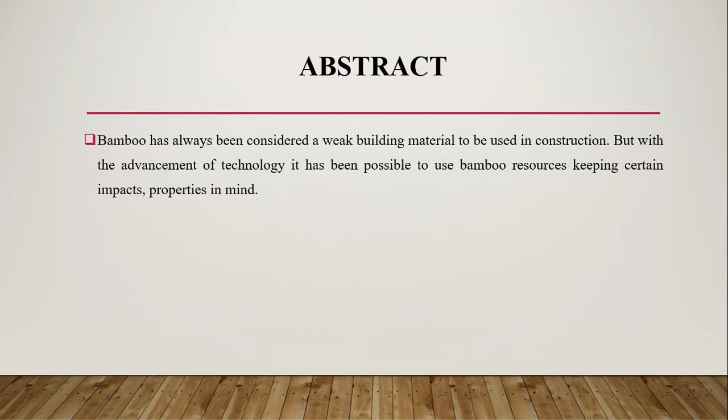Starting from abstract. Bamboo has always been considered a weak building material to be used in construction because we use steel of grades such as Fe250, Fe415 and Fe500. But with the advancement of technology, it has been possible to use bamboo resources keeping certain impacts and properties in mind. Northeast of India has abundant bamboo resources.

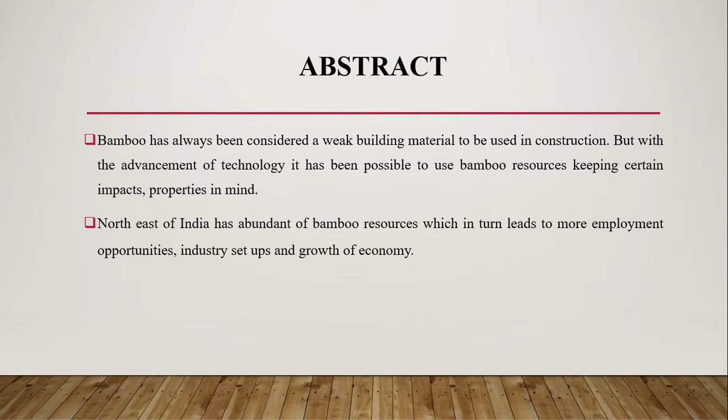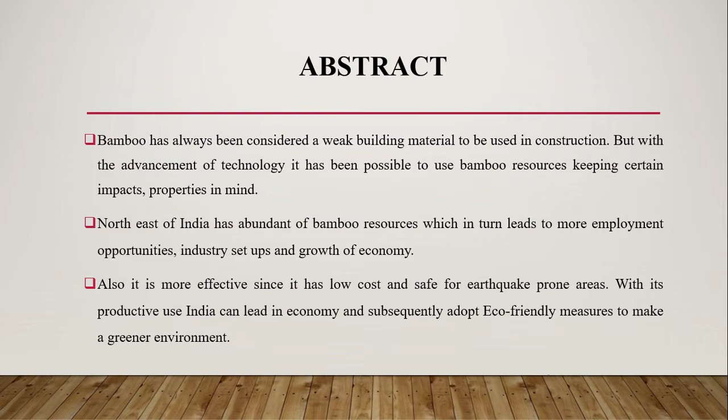Northeastern states like Assam, Meghalaya, Mizoram, etc. have abundant bamboo resources, which leads to employment opportunities, industry setups and growth of economy. Also, it is more effective since it is low cost and safe for earthquake prone areas, since the northeastern part of India is in zone 5 as per Indian Standard Code 1893 Part 1 2016. So with its productive use, India can lead in economy and subsequently adopt eco-friendly measures for a greener environment.

Coming to introduction. The northeastern region, a landmass of 8 states, spreads over an area of 2,62,179 km square, which represents about 8% of the total geographical area of the country, with a population of about 39.04 million, and is a region which is abundant in bamboo resources. The region houses about two-thirds of the bamboo resources of India, spreading over an area of about 3.10 million hectares, where 89 species of bamboos are available.

The main center for technological input in respect of bamboo is located at Guwahati, and it is named as Cane and Bamboo Technology Center. Among other industries, a bamboo wood factory has been set up in Jagi Road. ACES BioWealth Private Limited has been set up. According to it, bamboo has the capability of being water resistant for about 100 years.

Coming to positive impact. Modulus of elasticity of bamboo is in the range of 1.5 to 2 × 10^5 kg per centimeter square, while that of mild steel is 2.1 × 10^6 kg per centimeter square, thus making it suitable for reinforcement if used after certain treatments. Certain treatments like natural and non-natural are there. In case of natural, high steam temperature method is one of the effective methods, and a chemical one like borax salts treatment is there.

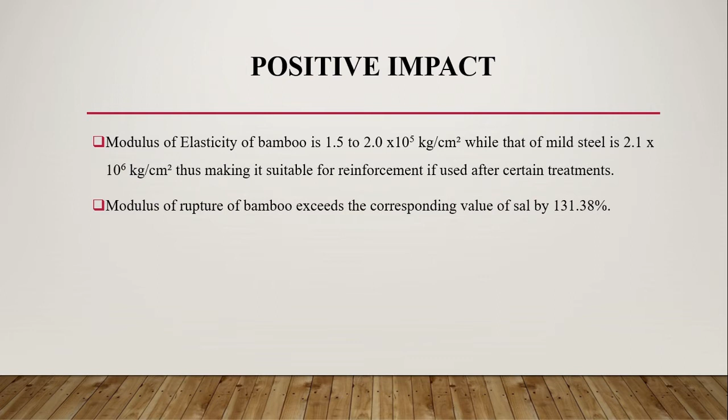Modulus of rupture of bamboo exceeds the corresponding SAL value by 131.38%. SAL is used in door frames, wooden beams, etc. So, in place of SAL, bamboo can be used. Safe working stress in compression of bamboo is 105 kg per centimeter square, and the allowable compressive stress value has decreased by 20%. It can withstand up to 3656 kg per centimeter square of pressure, whereas mild steel has about 2547.5 kg per centimeter square. So bamboo has even more than mild steel.

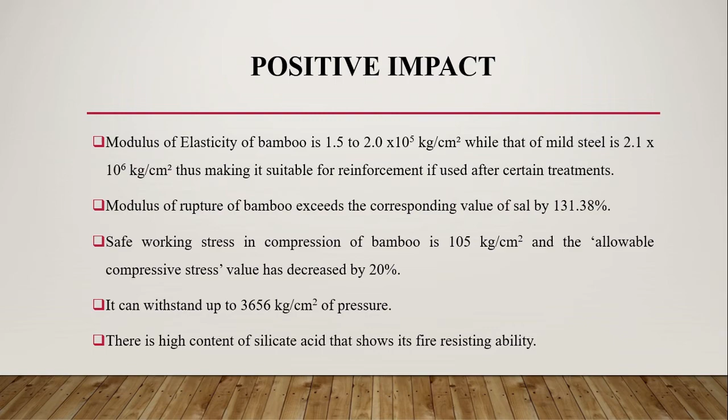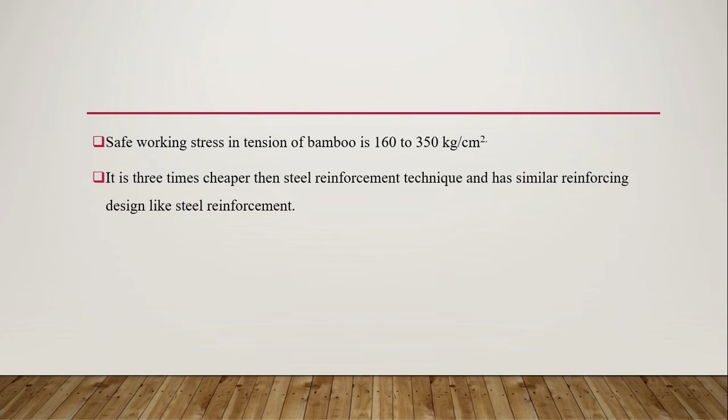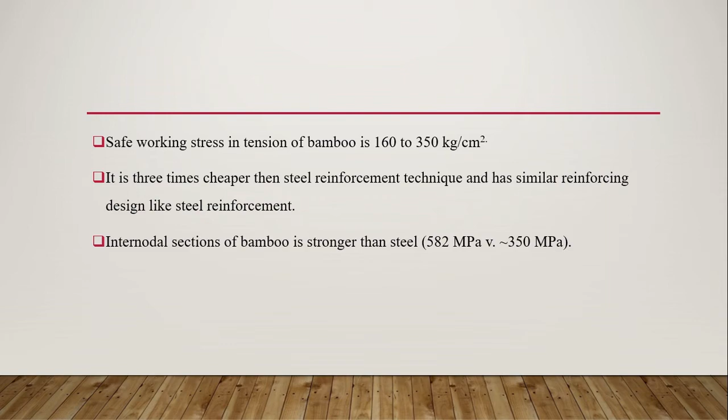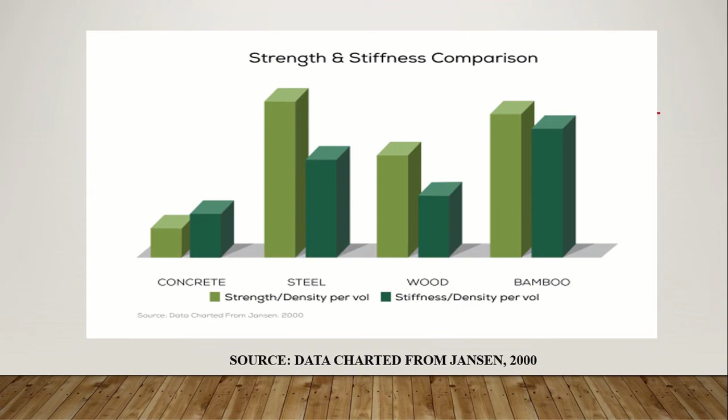Here is data charted from Jansen. We can see the comparison of strength and stiffness. The light green bars are strength by density per volume, and the dark green are stiffness by density per volume. We can see steel and bamboo in case of strength by density per volume have not much difference, while in case of stiffness by density per volume, bamboo exceeds steel. So it is undoubtedly the most effective if used in reinforcements.

Negative impacts. Despite having positive impacts, we must also look at the negative impacts for more improvement. Bamboo is weak at the node section, so failure can occur. Bamboo is a highly anisotropic material having a strong fiber orientation, but in the vicinity of nodes, the fiber diverges from the longitudinal orientation. It has low modulus of elasticity. In flexural members like slab and beam, if bamboo is used, some cracks may be developed.

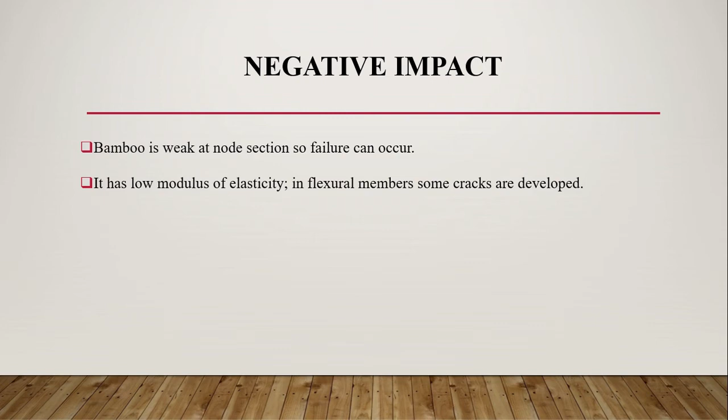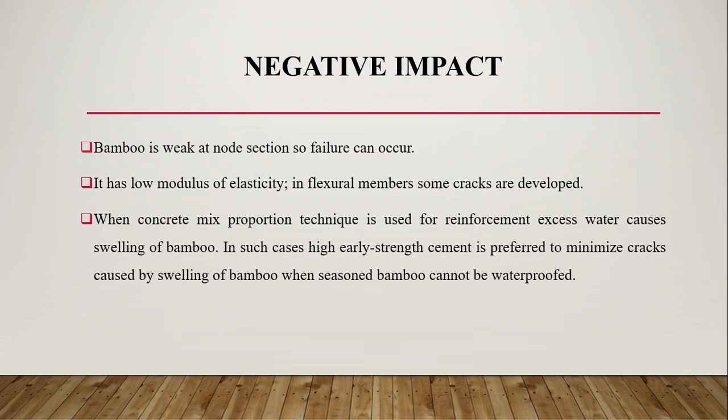When concrete mix proportion technique is used for reinforcement, excess water causes swelling of bamboo. In such cases, high early strength cement is preferred to minimize cracks caused by swelling of bamboo when seasoned bamboo cannot be waterproofed. When using whole culms, the top and bottom of the stems have to be placed in alternate positions in every row, and the nodes or collars should be staggered, otherwise it will lead to non-uniform cross-section of the bamboo throughout the length of the member.

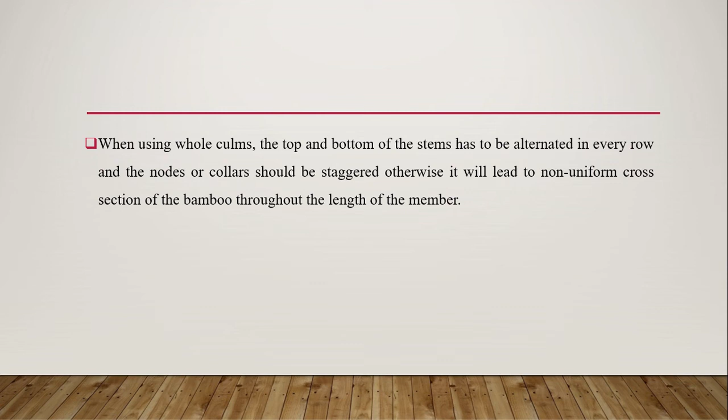We should avoid cutting bamboo in early spring or early summer. These culms are generally weaker due to increased fiber moisture content. Harvesting of bamboo at the end of rainy season or at the beginning of dry season is preferred, when the starch content is lower.

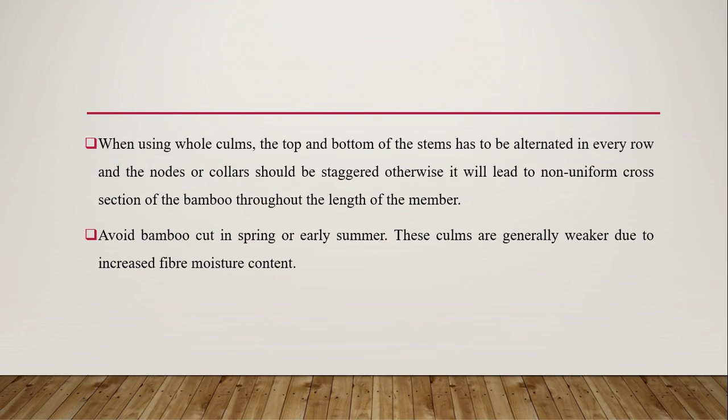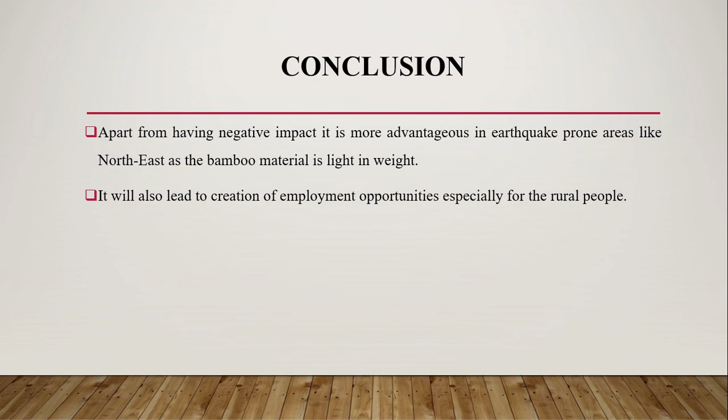I would like to conclude my presentation with the following points. Apart from having negative impacts, it is more advantageous in earthquake prone areas like northeast, as the bamboo material is light in weight. In other countries also like Japan, which is a highly earthquake prone area, it can be used effectively. It will also lead to creation of employment opportunities, especially for the rural people.

It also needs to be noted that bamboo is grown and used in almost all Southeast Asian countries like Indonesia, Singapore, Philippines, Malaysia, etc. China in the present day world has come out with many advanced technologies and different uses of bamboo. China has the highest availability of bamboo in the world, and India comes next, because China has grown timber crops in mountainous regions. Output production of more than 1 million tons of bamboo paper and bamboo pulp production capacity of 4 million tons is happening in China.

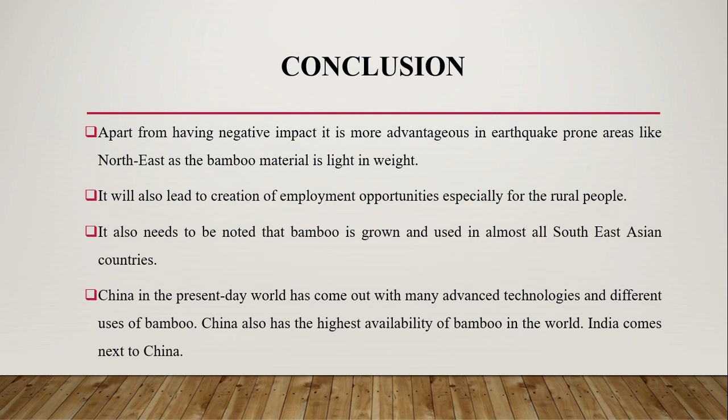With this, I would like to end my presentation, and I hope with my research article I am contributing a little bit to the society.